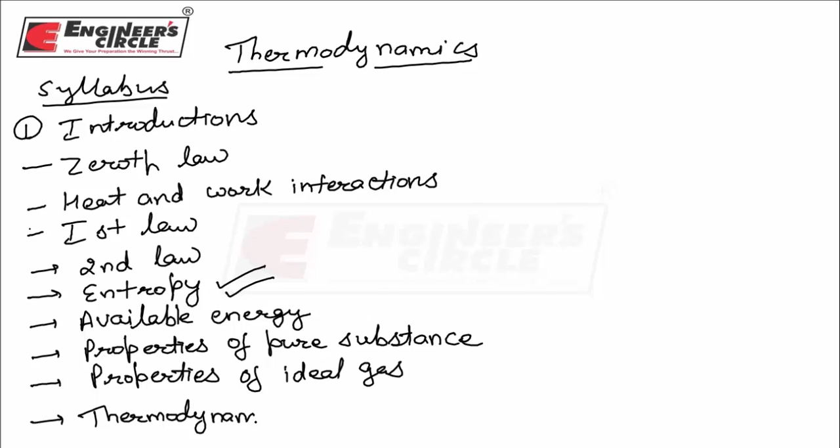Our last chapter would be thermodynamic relations. In this chapter, we will study the mathematical terms of thermodynamics, like TdS equations, energy equations, Joule-Thomson coefficient, Clausius-Clapeyron equation, and so on. This chapter is basically a mathematical chapter, nothing more than a conceptual chapter.

So this will be my whole syllabus for engineering services and for GATE. If I would start with the introduction part, first we will learn about some basic concepts of thermodynamics.

Before going to some basic concepts of thermodynamics, first of all we have to know what this subject belongs to, means what is the meaning of thermodynamics, what we are going to learn in this chapter. So thermodynamics is a science of energy transfer.

Thermodynamics is a science of energy transfer and its effect on properties of a system. This is the meaning of thermodynamics. It is a science of energy transfer and its effect on properties of your system.

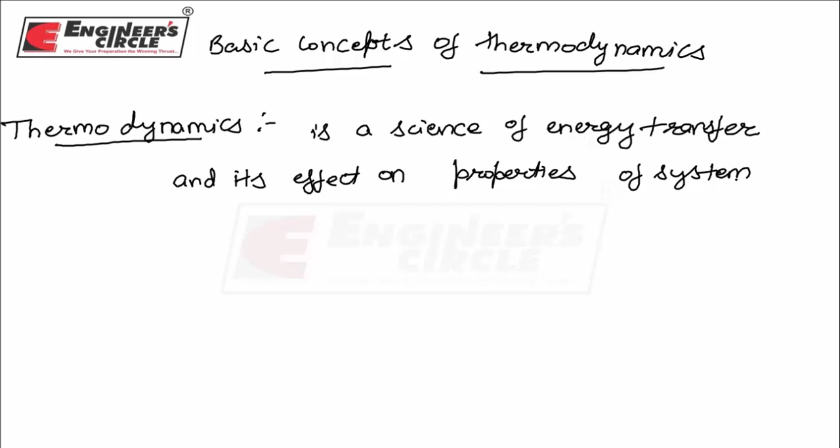The main aim of thermodynamics, if I talk about the aim of this chapter, is to convert disorganized form of energy. We will study later what is the meaning of disorganized form of energy, or low grade form of energy, which is known as heat. Heat is a form of disorganized energy. So the aim is to convert disorganized form of energy, that is heat, into organized form of energy. This is the basic aim of the chapter of thermodynamics.

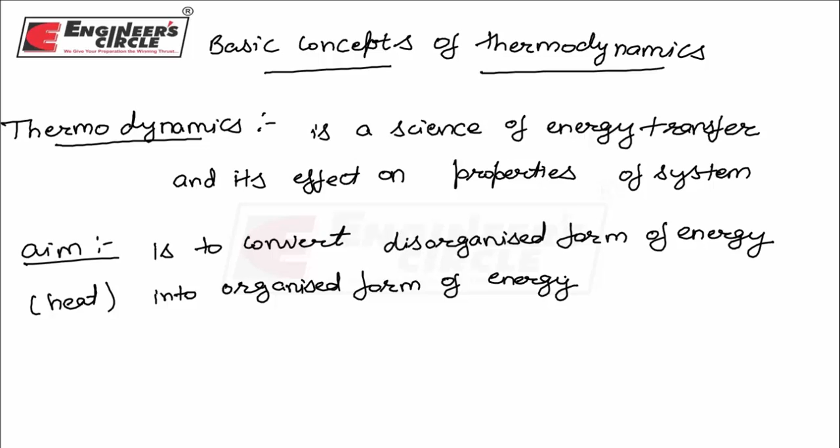So if I go to some basic terms of thermodynamics, first of all my basic term is: what is the meaning of system? If I would say, system is a region in space upon which the study is focused. This means the system is that region of space in which you have to study the various properties of the system, what changes occur in the system because of some heat transfer or work transfer. So that space on which you focus during the experiment is known as the system.

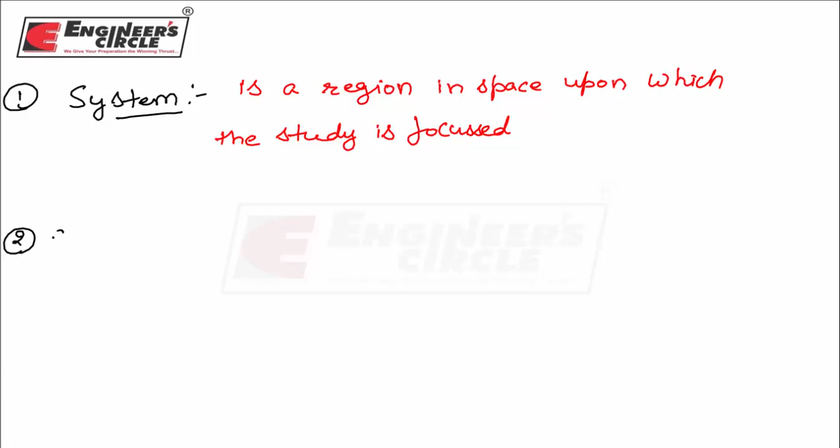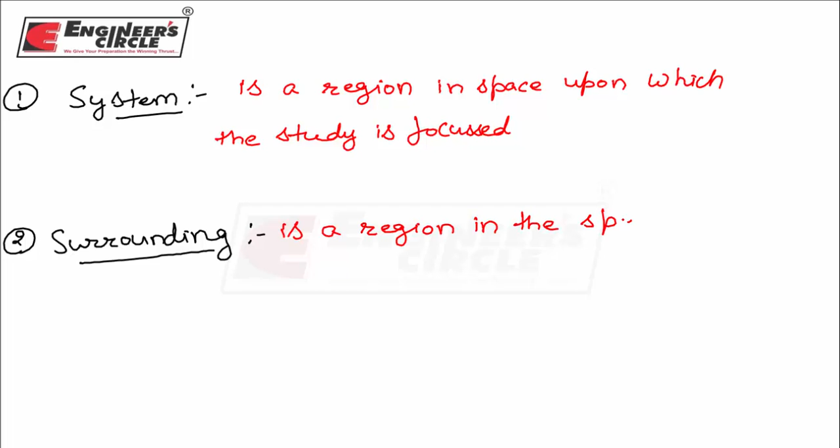The next term we will discuss is surrounding. Surrounding is, if we talk about it, while system is that space on which my concentration occurs during my experiment, surrounding is a region in the space which is external to the system. First of all, during the experiment we define what is my system, and anything which is external to that system is the surrounding. Please note that anything which is external to the system is your surrounding.

So the system may be defined as an open system or closed system, we will discuss it later. But when we define a system, a region in space, anything external to that region is my surrounding. So the system would be of three types: one is closed system, one is open system, and the last one is isolated system. We will discuss these later.

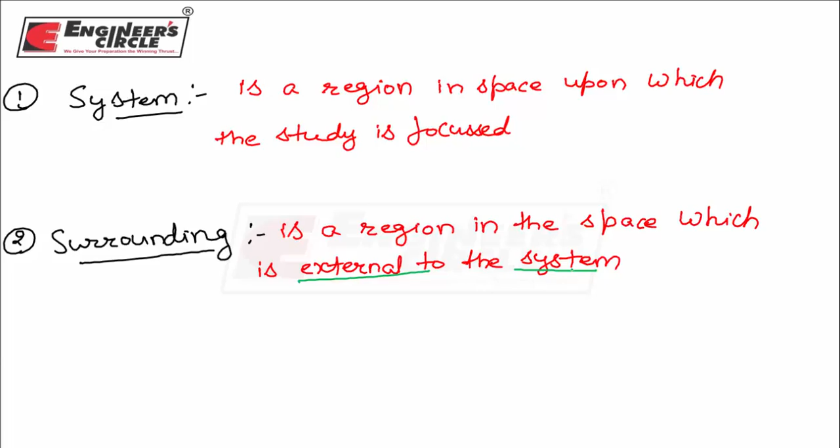The next definition is of boundary. Boundary is that region, or that separation between system and surrounding. That layer or membrane which separates your system and surrounding is known as the boundary. Anything which separates your system and your surrounding, that thin layer or membrane or boundary, is known as the boundary of the system.

If I talk about the various properties of the boundary of the system, the boundary may be rigid, meaning it will not move. It may be flexible, meaning it will move during the experiment. It may be real, actually present in the system, or it may be imaginary. There are four types of boundary: rigid boundary, which does not move; flexible boundary, which moves in the direction of the process during the experiment; real boundary, which is actually present in the system and which we can see with our eyes; and the last one is imaginary boundary, which we draw during our experiment because of the non-existence of a real boundary.

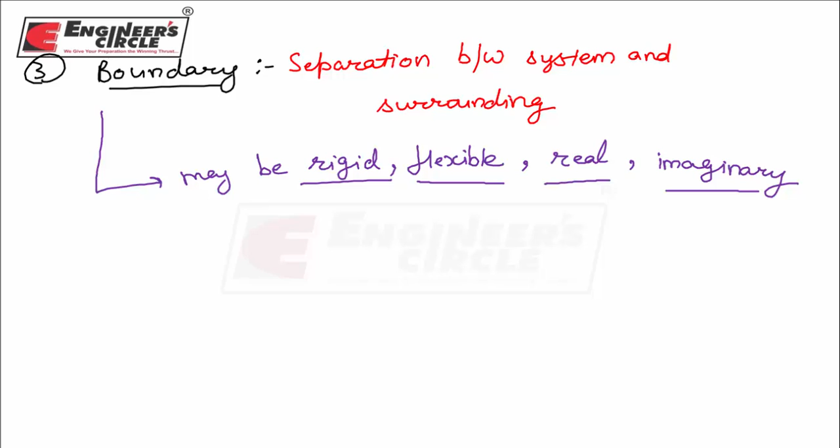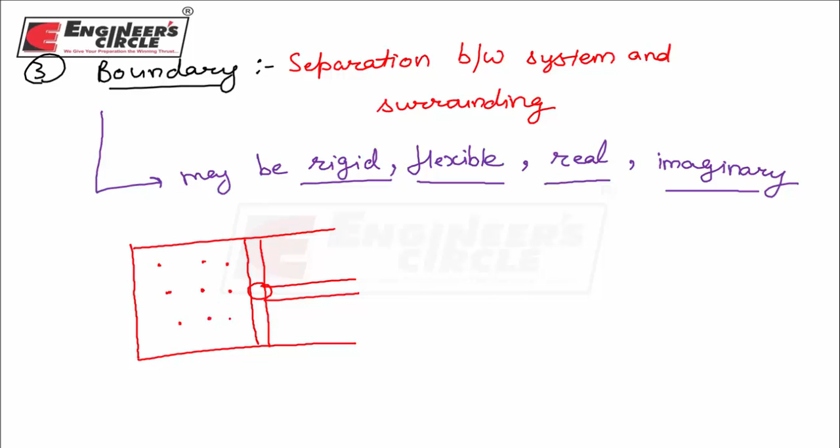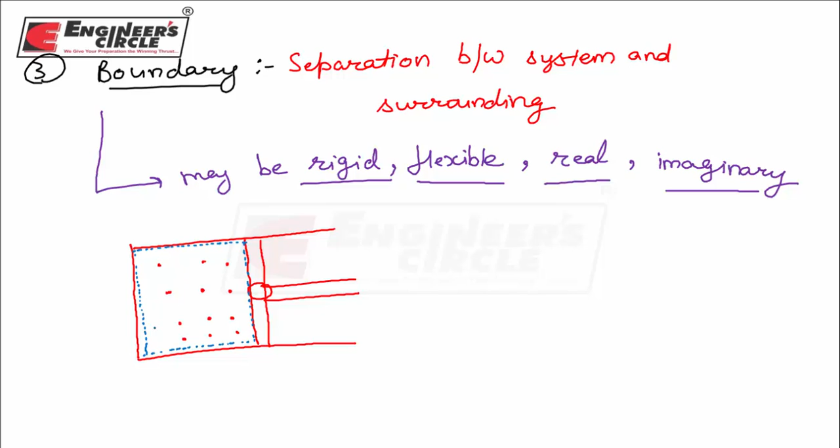Suppose I have to define the system for this piston cylinder arrangement. I would say that this dotted part is my system—my whole concentration during the experiment is focused on this area. External to this dotted area is my surrounding.

So if we talk about the system and surrounding, the layers that differentiate between them are known as the boundary. In this system there are four boundaries. Three of these, the dotted lines above and on the sides, are rigid boundaries, meaning they will not move during the experiment even when the piston is moving.

If I talk about the boundary coinciding with the piston wall, this boundary will move when the piston moves. So this is a type of flexible boundary. If compression occurs, volume decreases and the piston moves towards the left. If expansion occurs, the piston moves towards the right. So that wall moves along with the process, and this is known as the flexible boundary.

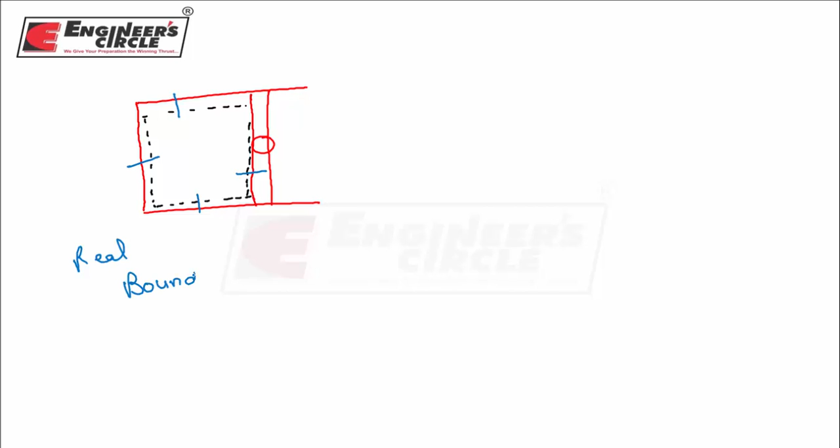Now let's talk about the meaning of real and imaginary boundary. Again considering the same piston cylinder arrangement, this dotted part is my system. We already know this system has four boundaries present, and all of them—this boundary and these dotted lines—are real boundaries, meaning they are actually present in the system. We can see them with our eyes. So these are known as real boundaries.

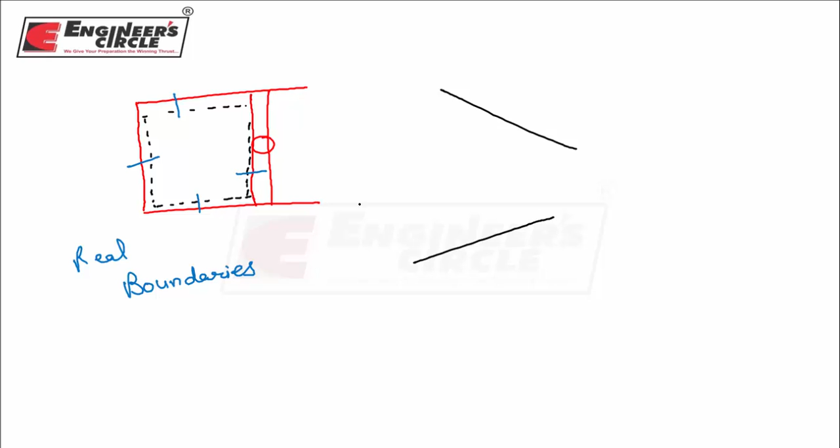Now let's talk about the meaning of imaginary boundary. Suppose I am considering a nozzle in which fluid flows from this direction to this direction, through this converging nozzle. This is a case of open system, which we will discuss later. In this case, I would say that this dotted part is my system. My consideration is only on this dotted part—I am interested in the properties of the system inside this dotted portion. I defined my system through this type of boundary.

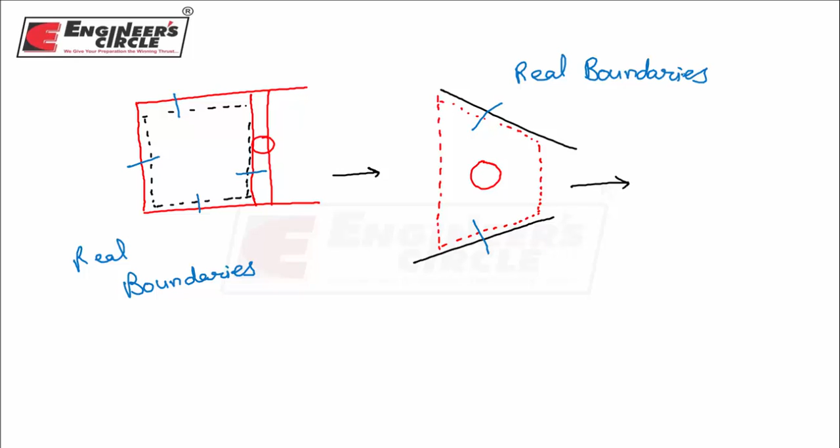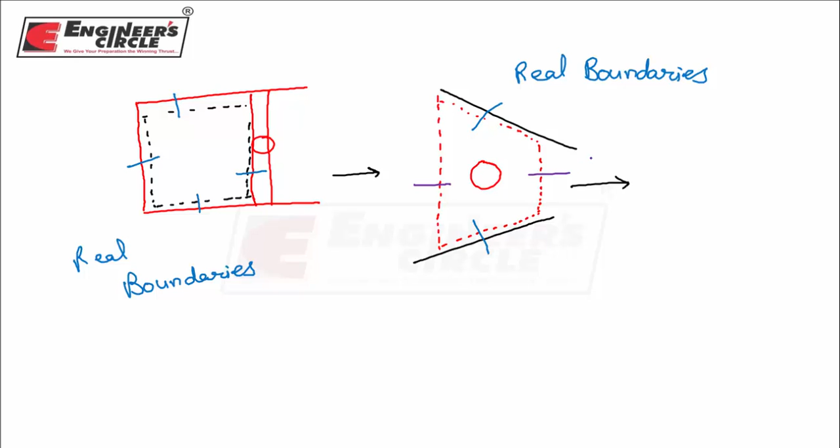Going through the types of boundary here, these two boundaries which are actually present in the system are known as real boundaries, because they are actually present. The other two boundaries are not exactly present in the system—I only virtually draw these two lines to define my system. If I don't draw these lines in the space, I will never define my system. So these are known as imaginary boundaries, because they are not actually present in the system.

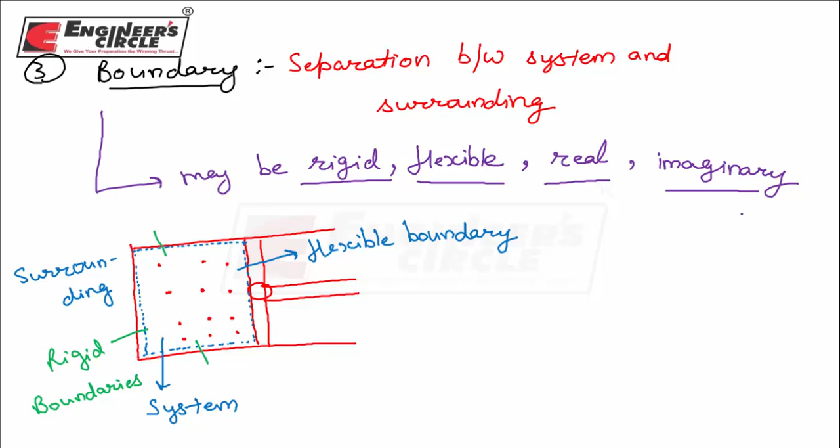So boundaries are of two types. One is rigid and flexible boundary—rigid boundary means it will not move during the process, flexible boundary means it will move during the process. The next type is real boundaries, which are actually present in the system, and imaginary boundaries, which we draw so that we can make our system more or less defined. Also, the system and surrounding together comprise the universe.

If I would say that one thing I will study is my system, anything external to that system is my surrounding. And if I combine my system and surrounding, this will cover my whole universe. You have to note this point: the region on which your study is focused is your system, anything external to that region is your surrounding, and the combination of system and surrounding is known as your universe. So universe is system plus surrounding.

Next, our topic is types of system. As I earlier told you, there are three types of system. The first one is your closed system.

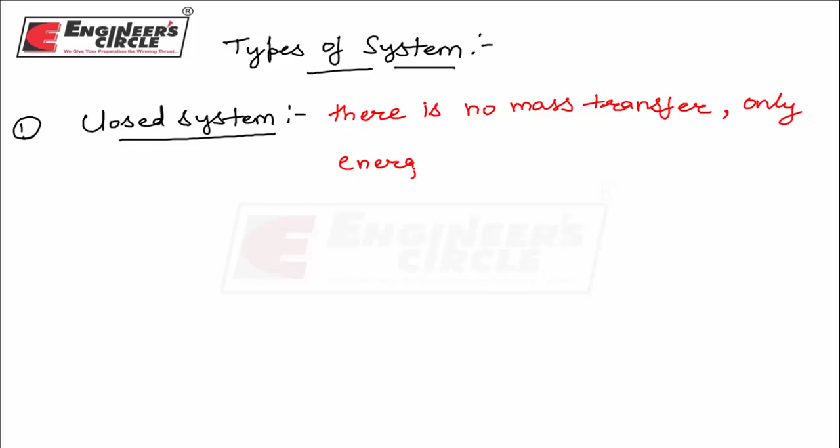As the name suggests, closed system means there is no mass transfer. Only energy can transfer in the system. Mass would never enter the system, nor will it leave the system. Energy is of two types: only heat or work can enter the system or go out of the system, but mass will never leave or enter the system.

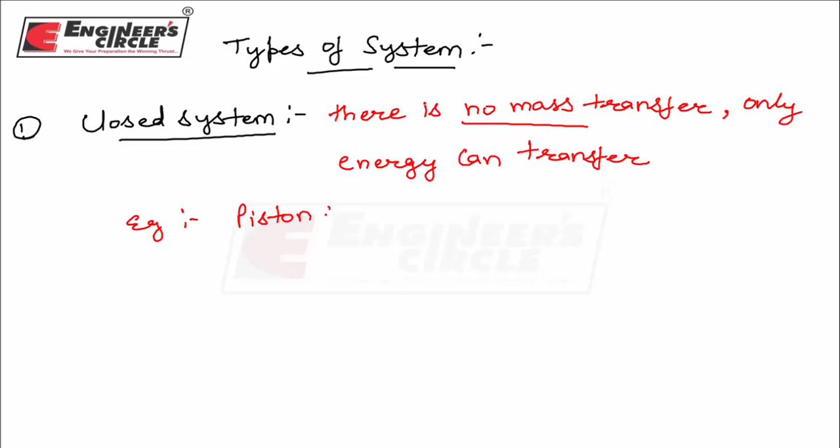If I talk about the examples of closed system, an example of closed system is your piston cylinder arrangement, which we studied earlier. So this piston cylinder arrangement without having any valves is your closed system. So closed systems are those in which there would be no mass transfer.

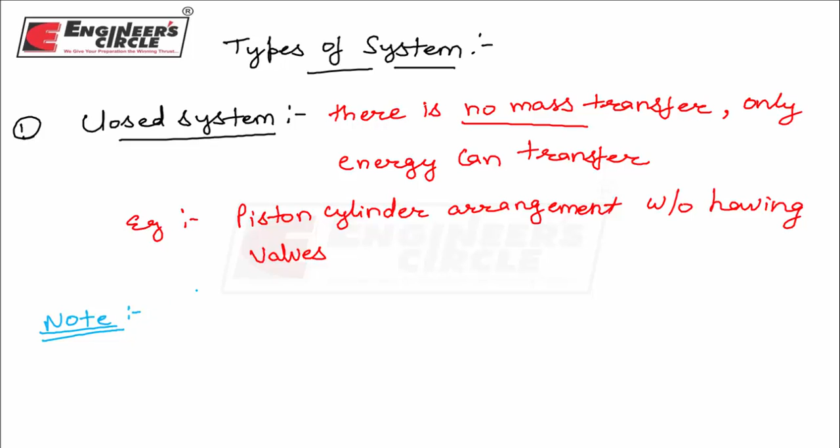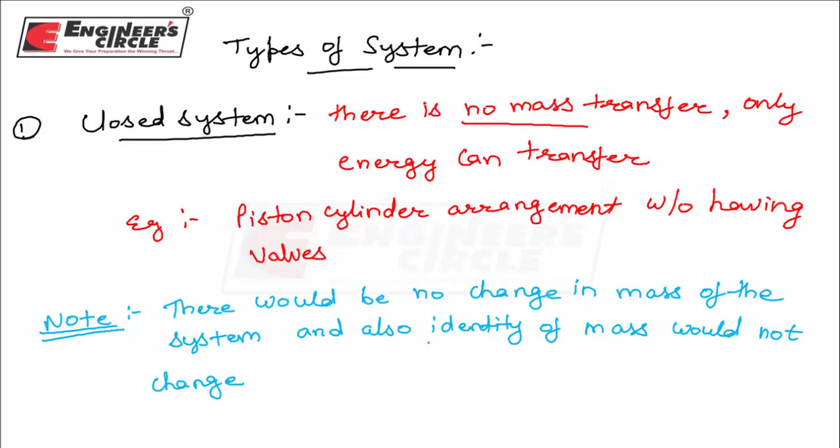If I take it in another definition, in closed system you have to note one most important point. There would be no change in mass of the system. Mass of the system would not change, and also, most important, the identity of the mass would not change. What is the meaning of this line, identity of mass would not change?

Let us suppose that this is any system which I will define. I draw the boundaries to define my system: the area under this dotted line is my system. From here there is some mass flow rate, m dot 1. This is your inlet section and this is your outlet section, and from the outlet there is a mass flow rate, suppose m dot 2.

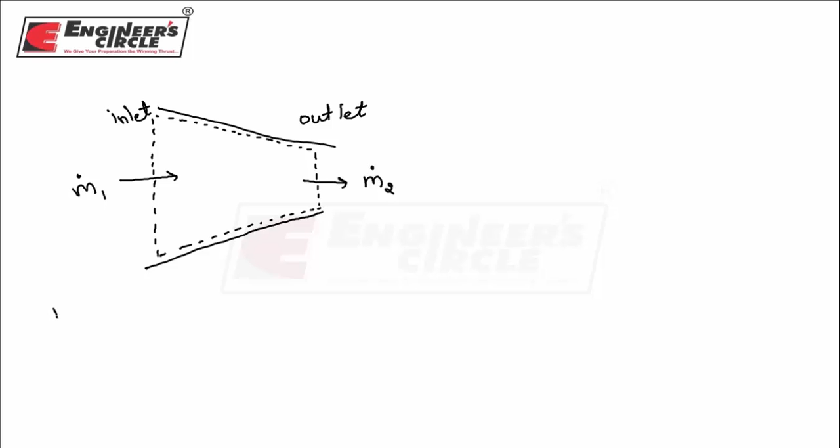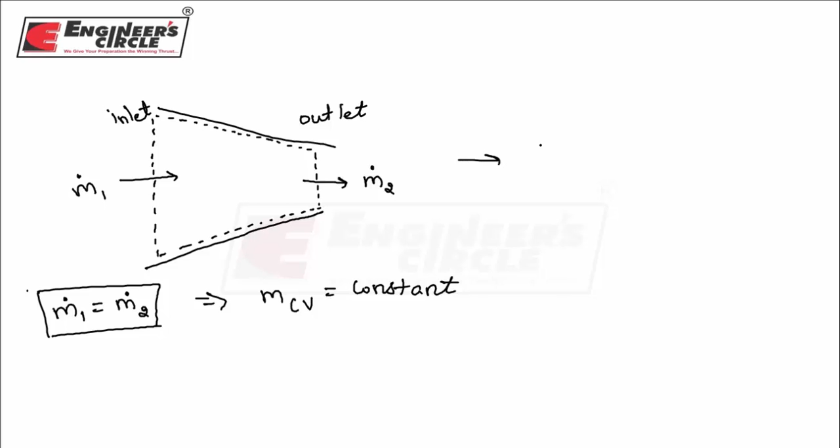If the mass flow rate m dot 1 is equal to the mass flow rate m dot 2, the mass entering is equal to the mass leaving the system, it means the mass of the control volume, or of your system, is constant. But this is not a closed system, because in this case the identity of mass in the system changes, and if identity changes, it is not a closed system.

What does the change of identity mean? Suppose a particle enters; it will have some energy. When a particle enters a thermodynamic system, it will have four types of energy: internal energy, flow energy, kinetic energy, and potential energy. So when m dot 1 enters the system, it has some kind of energy, some identity. When it leaves, it will have another kind of energy, another identity, because its identity changes.

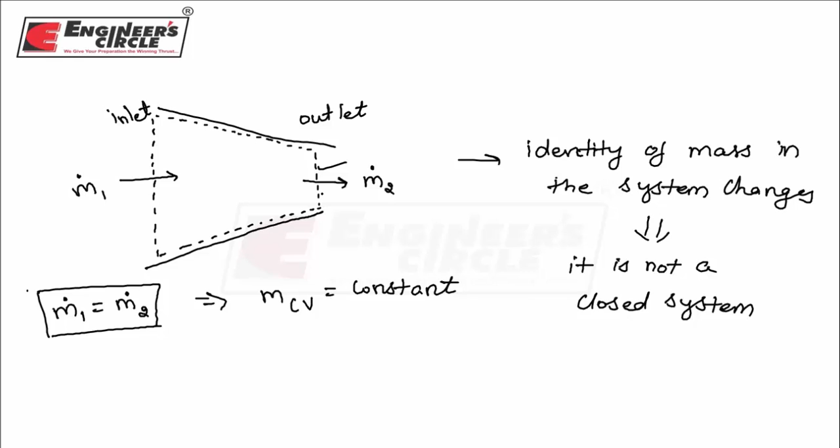Correlate it with your classroom: suppose there are 100 students, and at one instant one student enters and another leaves. The mass of that classroom will not change, but the identity of the person leaving is different from the person entering. Identity of the mass changes, so that system is not a closed system, it is an open system. In closed system there would be no change in identity of the mass. The second type of system is your open system.

Second type is my open system. Open system means both energy and mass can transfer. Both energy transfer and mass transfer takes place in the system.

It means in the system your mass can also transfer, mass can also enter into the system, also leave from the system, and also your energy, that is your work and heat, energy transfer can take place in the system. This is known as your open system. Open system has both energy and mass transfer taking place in the system.

If I talk about examples of this open system, we know there are devices known as turbines, pumps, compressors, etc. So turbine, pumps, compressor, in which mass transfer and energy transfer both take place simultaneously. It is known as your open system.

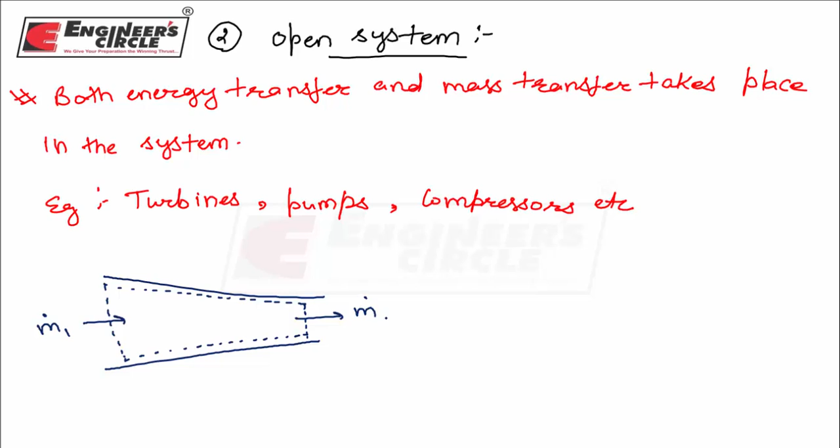Mass can enter, mass can leave. There is energy transfer also, means heat can enter the system, heat can leave from the system. Work can be done by the system, or we will do some work on the system. So work can be transferred, heat can be transferred, and also mass transfer will take place.

So in this case, in open system, the volume on which our study is focused is known as your control volume. Control volume is that region in space, in case of your open system, on which my whole analysis is focused, and this is known as your control volume.

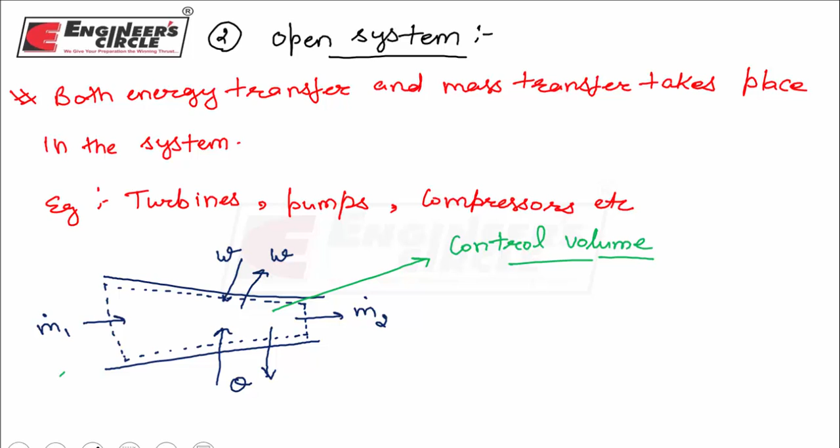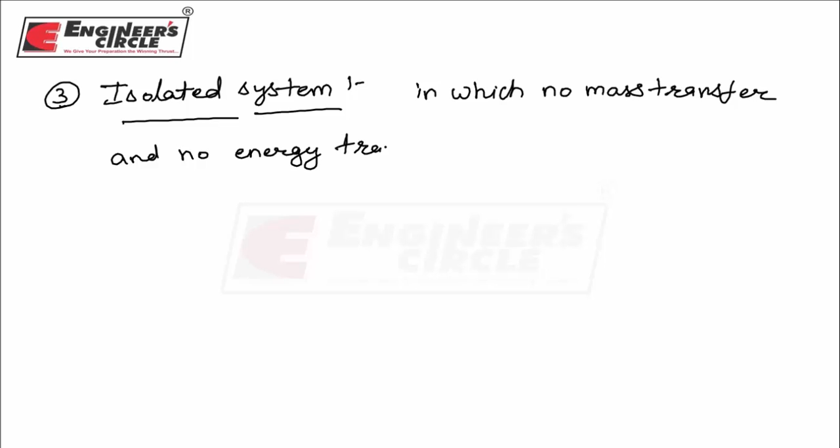Third type of my system is your insulated or isolated system. An isolated system is that system in which no mass transfer and no energy transfer takes place.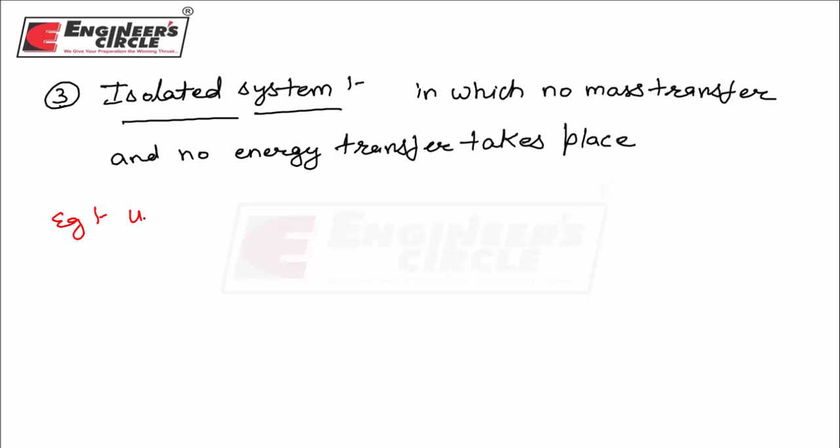If I talk about examples of your isolated system, one is the universe. Universe is my isolated system. You have to remember this, because we know the composition of the universe. Universe comprises your system and surrounding. The external to the system is surrounding.

So if we talk about the whole thing, the universe, there would be no mass transfer in the universe, and no energy transfer takes place in the universe. So this is the case of your isolated system. Next example is insulated bottles, our thermal bottles, in which we fill some warm water or something. So this is known as your isolated system.

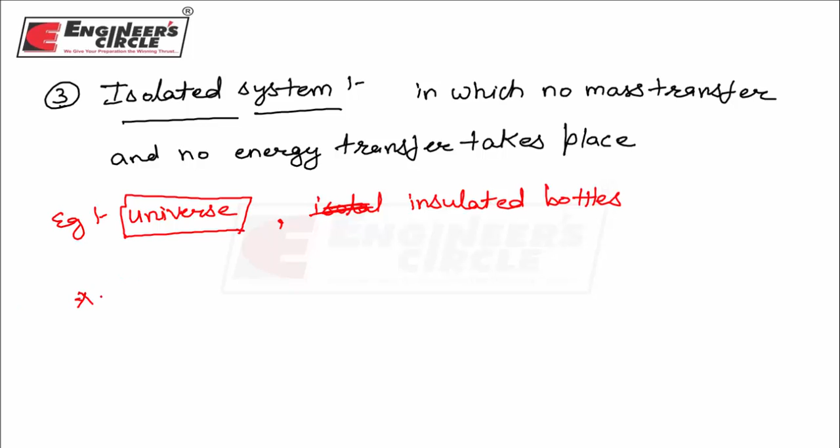So isolated system, if I precisely say, is a special case of closed system in which no energy transfer takes place. Remember, we know that in closed system there is no mass transfer, and if in that closed system there is no energy transfer, it will behave as an isolated system. So isolated system is that system in which no energy transfer and no mass transfer is taking place.

Next important topic is known as thermodynamic equilibrium. It's not a thermal equilibrium, it's a thermodynamic equilibrium. So what is the meaning of thermodynamic equilibrium? We will take everything with respect to the system, because my whole concentration depends on this part, that is the system.

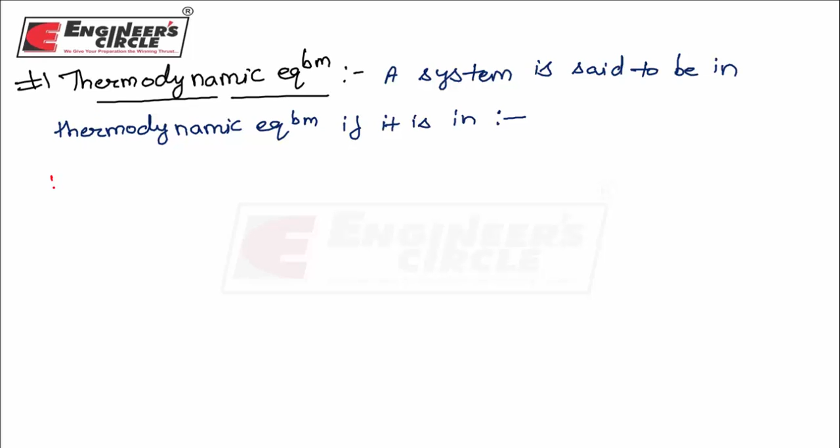A system is said to be in thermodynamic equilibrium if it is in, there are some cases, number one, thermal equilibrium. If it is in thermal equilibrium, means equality of temperature.

What does equality of temperature mean? Thermal equilibrium means the temperature of the system and that of the surrounding would be the same. There would be no temperature gradient present in the system and also with the surrounding.

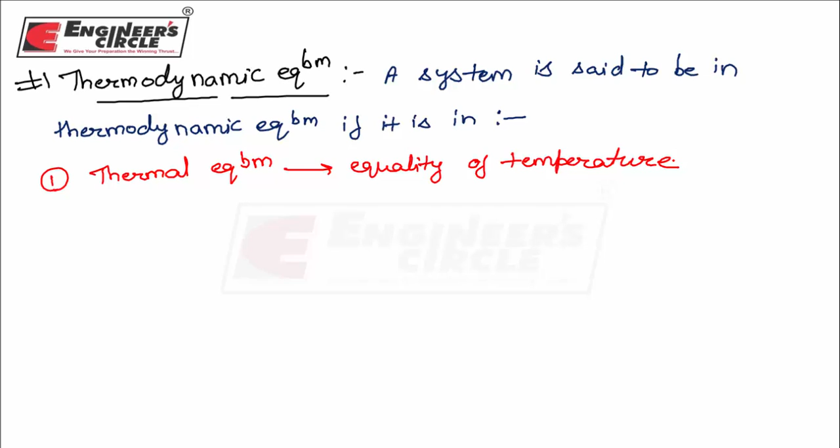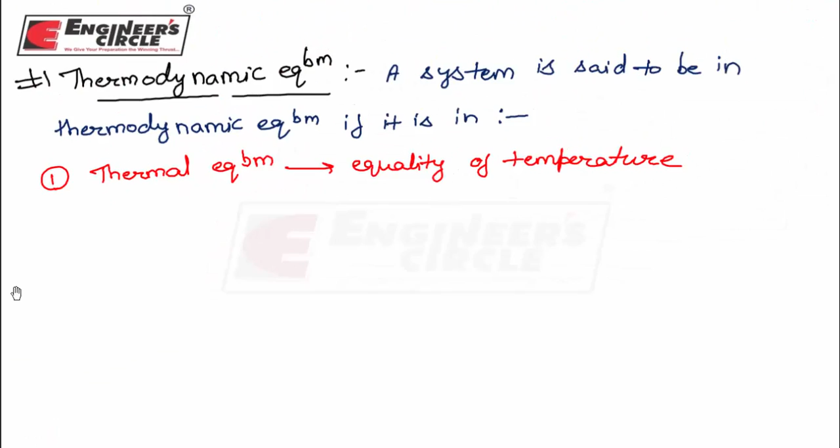Please remember, equality of temperature or thermal equilibrium, if I have to explain it here in short, what is the meaning of thermal equilibrium? Let us take this example. This is a system, any closed system. Suppose in this system the temperature is 50 degrees Celsius.

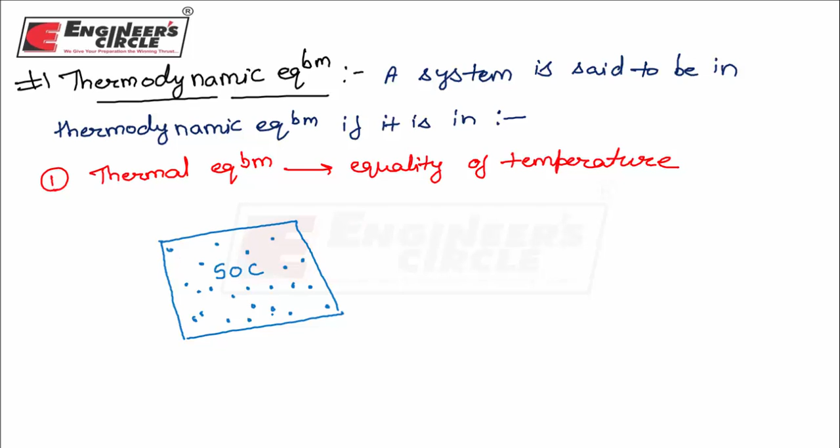There would be no temperature gradient inside the system, which means you take any point in the system, at every point the temperature would be 50 degrees Celsius. And external to this system behaves as my surrounding, and the surrounding temperature is represented by T infinity.

T infinity should also be 50 degrees Celsius, so that there would be no heat transfer, or precisely, there would be no temperature gradient between the surrounding and the system. Temperature gradient means the difference in temperature. As we know, if there is a temperature gradient present, heat will transfer.

So there would be no temperature gradient inside the system, and also no temperature gradient between system and surrounding. Then only we can say that the system is in thermal equilibrium. So for thermal equilibrium, equality of temperature holds good.

The second condition for thermodynamic equilibrium would be mechanical equilibrium. Mechanical equilibrium is equality of forces or pressures. What is the meaning of equality of forces or equality of pressure?

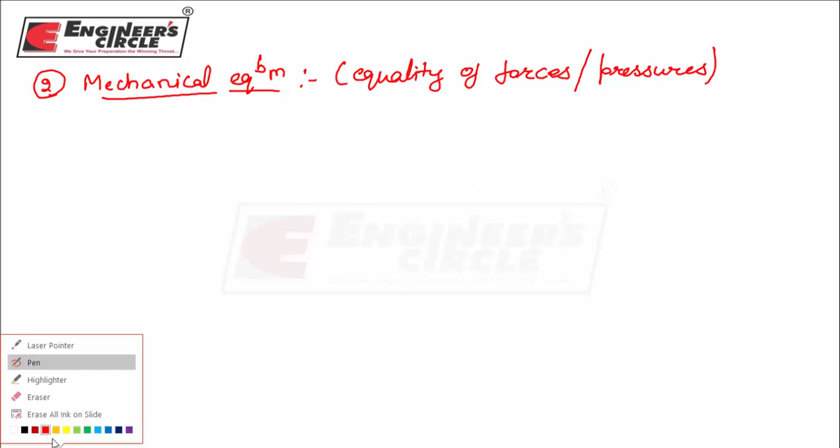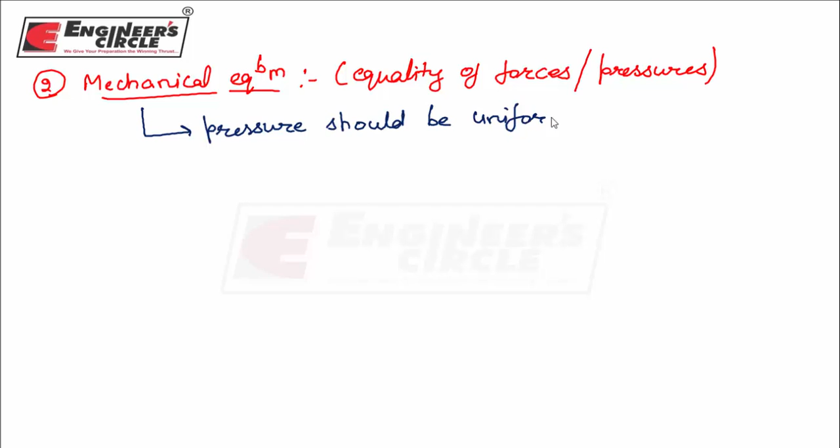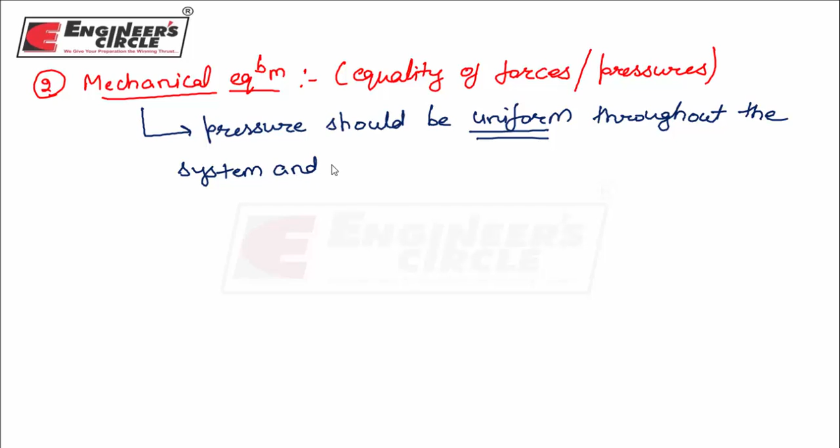Please note that equality of pressure means the pressure should be uniform throughout the system, and there would be no pressure gradient present inside the system, because we know that if there is any pressure gradient present, a net force occurs on the system,

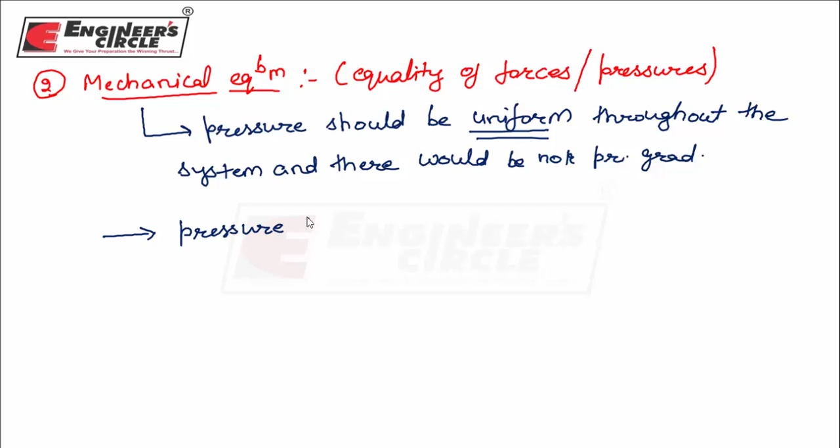so the system would never be in mechanical equilibrium. Here, in mechanical equilibrium, this pressure can change with time. It means it can be an unsteady state, but it will be uniform throughout the system. What is the meaning of this line? It can change with time. Suppose this is a system.

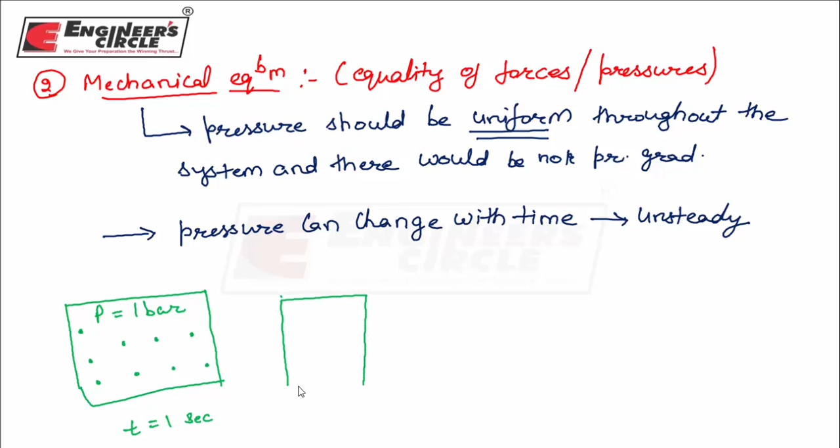When I study this system at t equal to 1 second, the pressure inside the system is 1 bar, which means at any point in this system the pressure would be 1 bar. And if this time changes, suppose I am studying at t equal to 5 seconds, the pressure will be 5 bar,

but it will remain 5 bar throughout the system, meaning at one instant the pressure should remain uniform throughout the system. It can change with time, but it will remain uniform at that instant. So pressure should be uniform but may be unsteady. It can change or not, depending on the process. So the second one is mechanical equilibrium.

The third condition is chemical equilibrium. What is the meaning of chemical equilibrium? Chemical equilibrium means there would be equality of chemical potential. No chemical reaction should occur inside the system. That means it behaves as an inert type of system. So chemical equilibrium means equality of chemical potential.

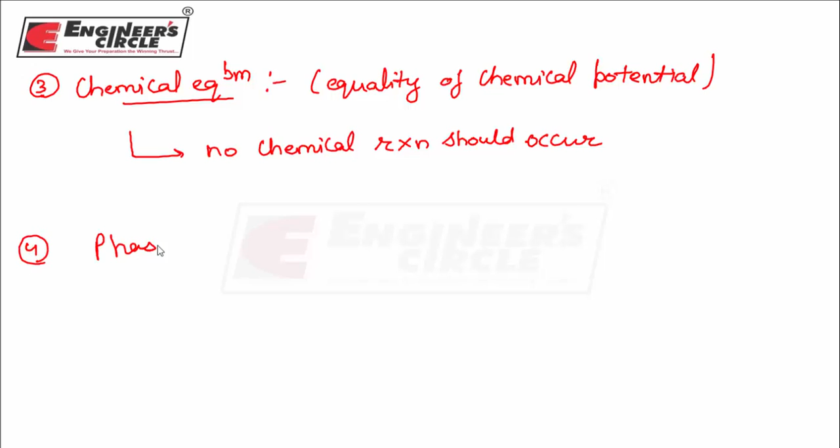And the fourth condition is phase equilibrium. Phase equilibrium means for thermodynamic equilibrium there would be no change in phase in the system, which means there is no conversion of solid to liquid or liquid to solid, solid to vapor or vapor to solid. Then only we can say that this system is in thermodynamic equilibrium.

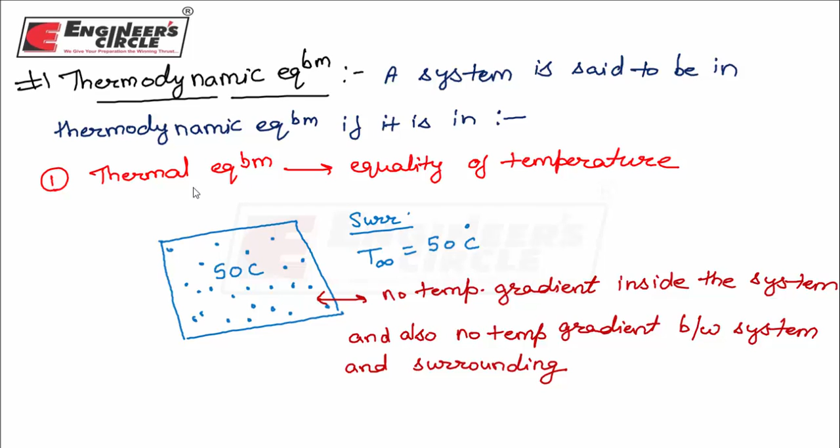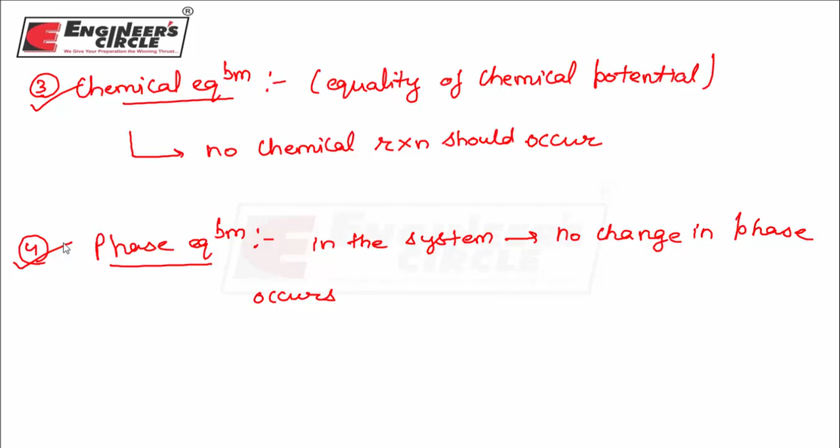So for thermodynamic equilibrium, the first condition is thermal equilibrium, second is mechanical equilibrium, third is chemical equilibrium, and fourth is phase equilibrium. Then only we can say that the system is in thermodynamic equilibrium. The next topic in this lecture is what is a pure substance.

What is a pure substance? We will discuss pure substance later also, but here I am only discussing the definition of pure substance, the meaning of pure substance. I will discuss the various conditions of pure substance and various phase diagrams of pure substance in our later chapters, but here I will introduce only the definition of pure substance for the time being, for your understanding.

A substance is known as a pure substance if it is homogeneous in chemical composition throughout. A pure substance is that substance which is homogeneous in chemical composition throughout. Chemical composition throughout means if I select any sample from that system, it will have the same composition throughout.

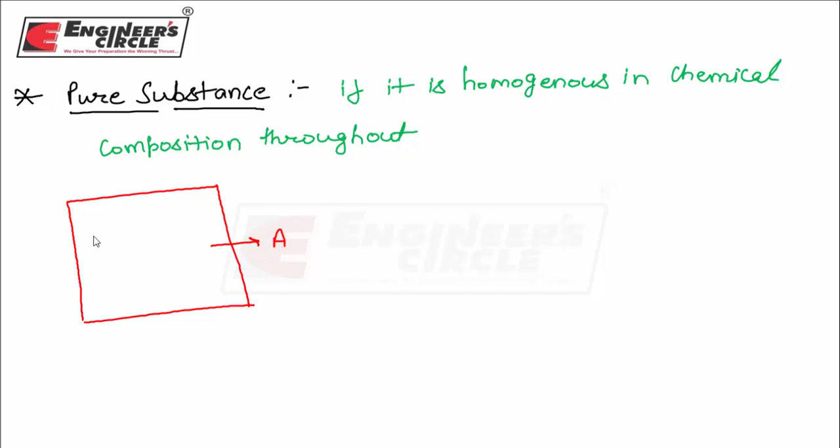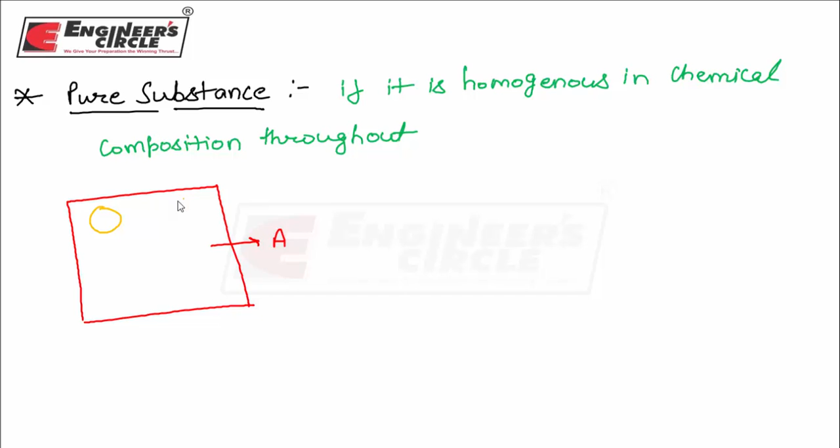This is my one substance, a system. If in this jar I fill some material, suppose some gas, A gas, and I take any sample of that gas from this system, suppose a sample from here, a sample from here, and one sample from here. If I take 5 samples from this system and all of them have the same chemical composition throughout, then only we can say that this is behaving like a pure substance.

All of the above samples should have the same chemical composition.

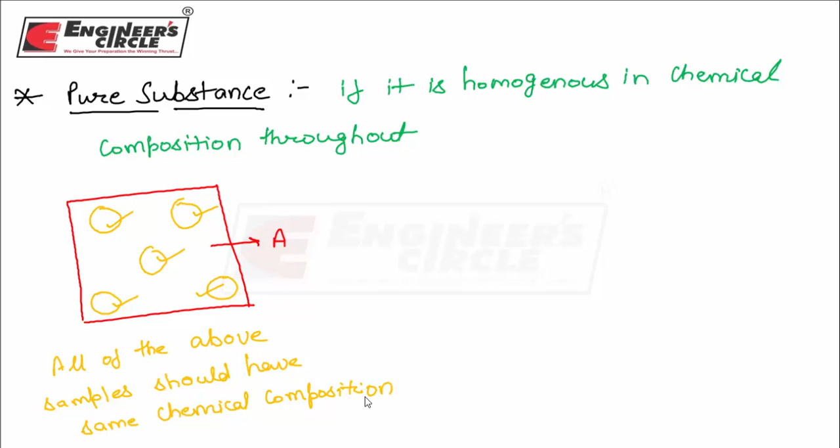If we take some example of pure substance, suppose this is a beaker, and here I fill some water. This is water, and here some steam is present. Steam is also a composition of water, because steam is another phase of water, which is in gaseous phase. So if I fill some water and steam, and I take 3 samples: one from the steam, one from the water, and one from the interface, some from water and some from steam.

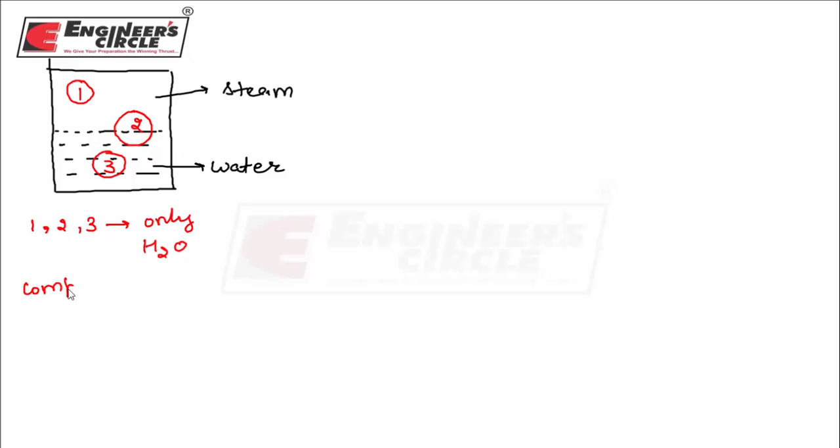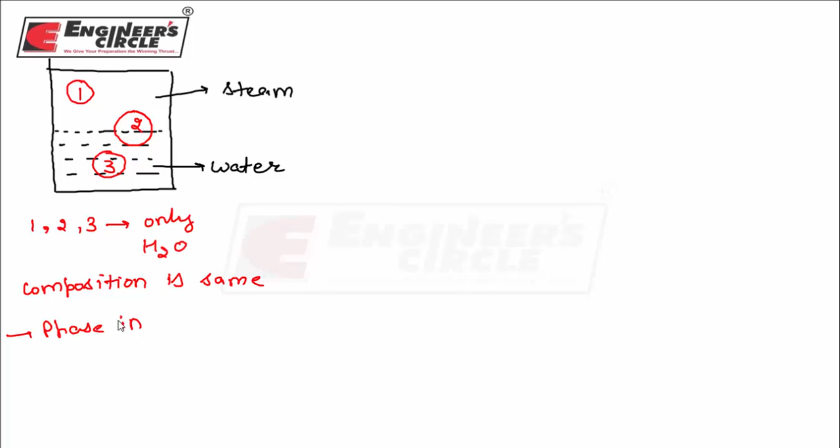This is my sample number 1, sample number 2, and sample number 3, and all of them have the same composition. Samples 1, 2 and 3 have only water; the phase may be different. Here the water is in gaseous phase, here it is in liquid phase, and here it is partially liquid, partially gas, but the composition is the same. For a pure substance, phase may be different, but composition is the same. So this is a case of pure substance.

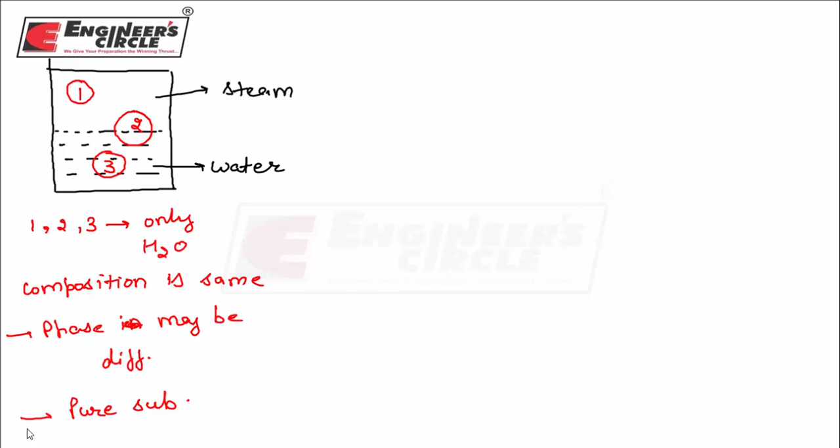Another example: here I took one beaker, and there is a partition, meaning one interface is there. Below is some water and above some oil is present. If again I take three samples, sample number 1 from this part, sample number 2 from the interface, and sample number 3 from here, in sample number 1 only oil is present, in sample number 2 partially oil and partially water is present, and in sample number 3 only water is present.

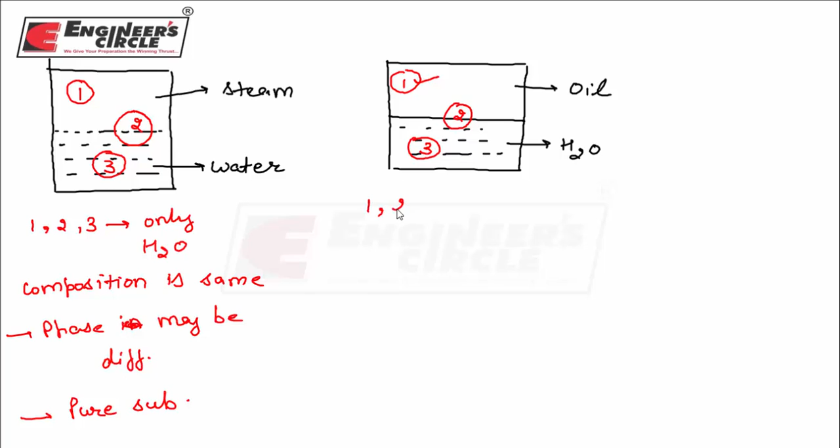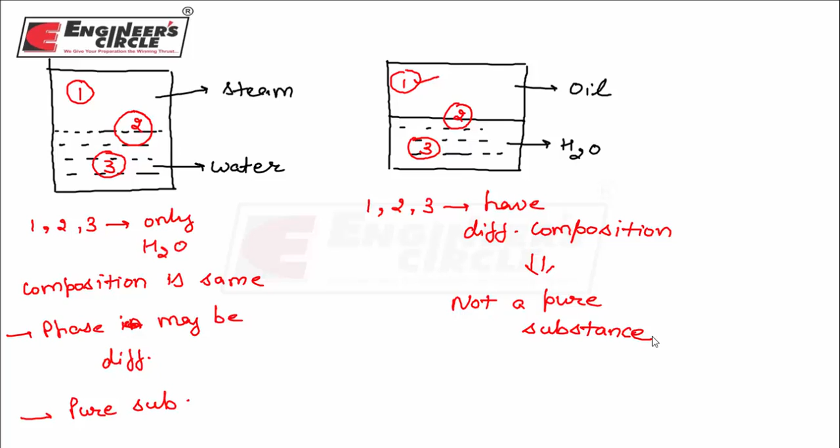So samples 1, 2 and 3 have different composition, which implies that it is not a pure substance. So for a pure substance, the system must be homogeneously of the same composition. Composition must be same throughout the system; the homogeneous mixture is known as pure substance.

Now, going ahead, the next basic topic of the introduction part is properties of a system. What is the meaning of properties of a system? Properties of a system are characteristics of a system.

Properties are characteristics of a system. These are the characteristics by which I am going to define my system. My system would be defined with the help of some properties like pressure, temperature, volume, mass, entropy, internal energy, enthalpy. All these are the characteristics of a system with the help of which I will say that in this system the pressure is so much, temperature is so much. So properties are the characteristics of a system.

Examples of properties of a system are pressure, volume, internal energy. We will talk about what is the meaning of internal energy; I am just writing here. Internal energy, enthalpy, entropy, and so on. I am writing only pressure, volume, internal energy, enthalpy and entropy. There are n number of characteristics of a system.

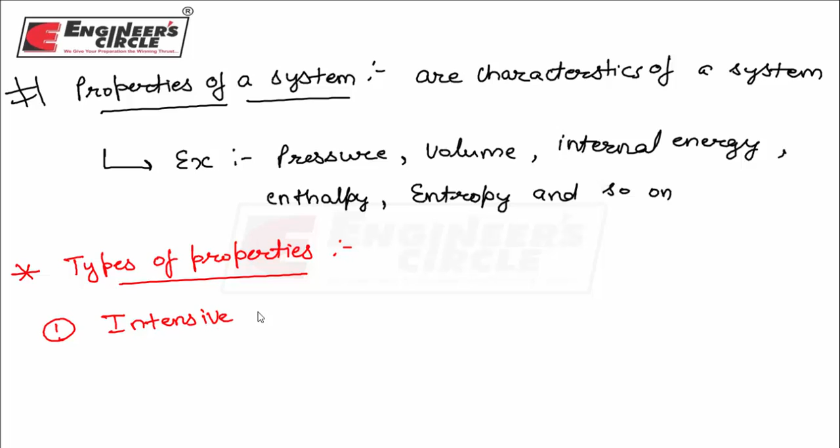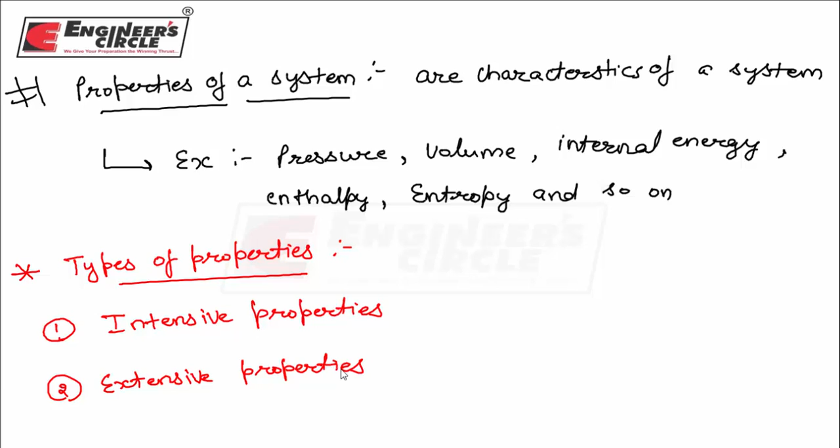Now the next most important topic is types of properties. There are two kinds of properties. First one is intensive properties and second one is extensive properties. We will take first intensive property. As we know, properties are the characteristics of a system, and these characteristics are of two types: intensive and extensive.

Intensive properties are those properties or characteristics which are independent of mass. They will not depend upon the mass of the system, which means if I decrease or increase the mass of a system, the value of that property remains the same as earlier. So to learn it: I is for intensive and I is for independent. Intensive properties are independent of mass.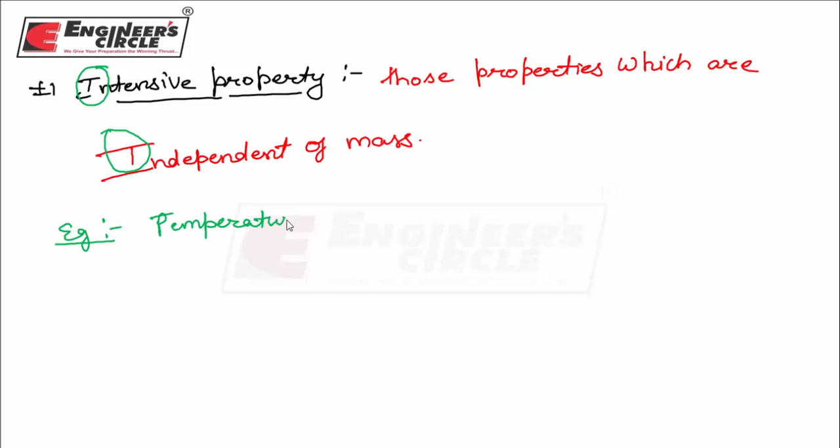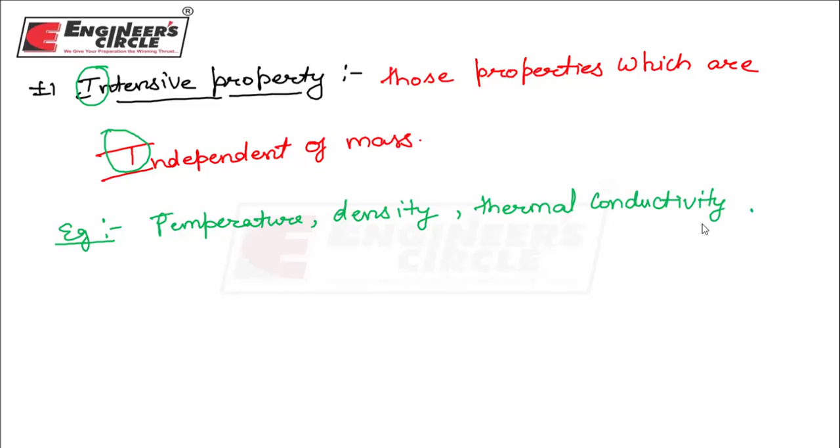Examples of intensive properties are temperature, density, thermal conductivity, viscosity, and pressure also. Pressure, temperature, density, thermal conductivity, viscosity, etc. are intensive properties which will not depend upon the mass of the system.

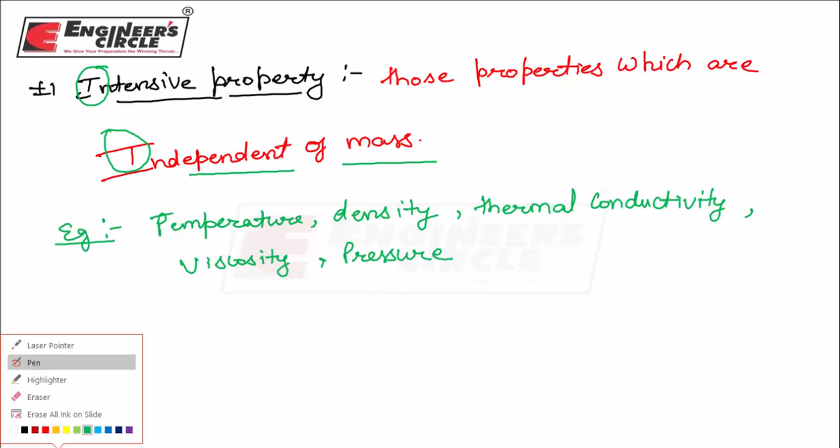What is the meaning of independent of mass of a system? Suppose there is a system having some mass, say 1 kg. If by any means I compress that system to a point, I know that a point has no mass, no volume and no area. That means at that point the mass of the system is 0. If at that condition also some properties are defined, then those properties are known as intensive properties.

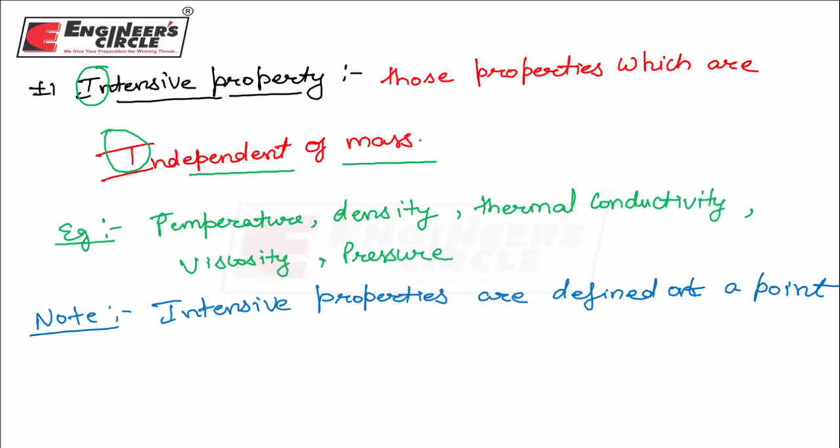Intensive properties are those properties which are still defined when you make the mass of a system 0. That means intensive properties are defined at a point. This is the most important conclusion. Only intensive properties are defined at a point, because intensive properties are independent of mass, and at a point mass is 0. You have to note this.

A good example is stress. In strength of material, you will study about stress. Precisely, stress is always defined at a point. I am only recapitulating your concept. If something is defined at a point, that means it is an intensive property. So stress in strength of material is an intensive property. This is the concept of intensive property; please note that.

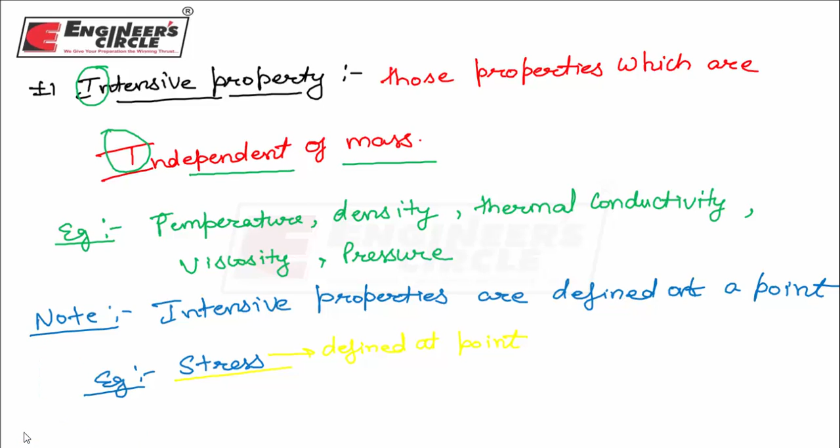The second type is extensive property. What is the meaning of extensive properties? As we know, intensive properties are independent of mass. So extensive properties are those properties which will depend on the mass of the system.

If I am going to increase or decrease the mass of a system, the values of these properties will change. So it will depend on the mass of the system. Those properties which depend upon the mass of the system are known as extensive properties, since extensive properties change when you change the mass of a system.

Some examples of extensive properties are volume, internal energy, enthalpy, and entropy. Volume, internal energy, enthalpy, entropy - these all are your extensive properties.

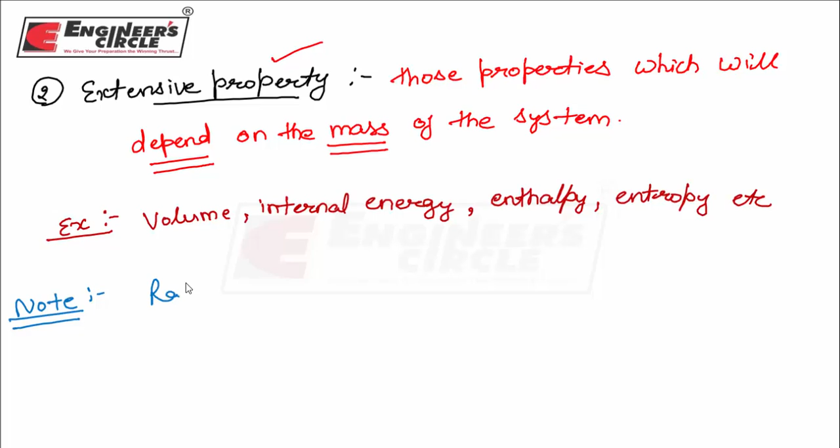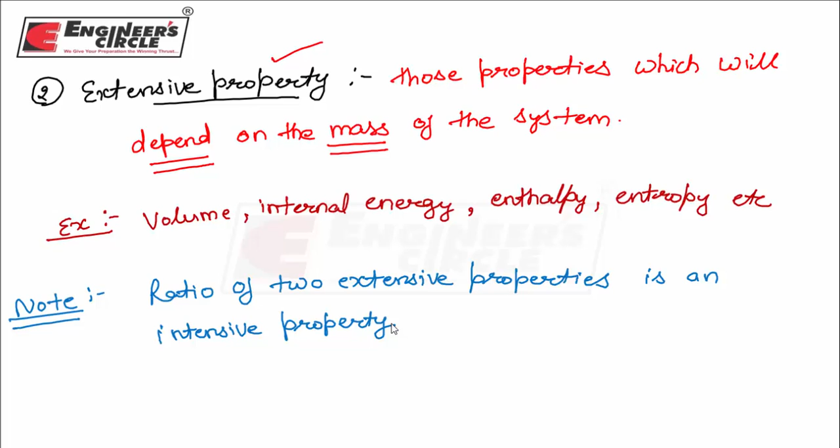Please note this important statement for your objective point of view: the ratio of two extensive properties is an intensive property. Meaning, if we take the ratio of two extensive properties, suppose internal energy per unit volume, enthalpy per unit volume, entropy per unit volume, that property is an intensive property. You have to remember this thing - the ratio of two extensive properties is an intensive property.

There is a term I am introducing here: specific properties. What is the meaning of specific properties? Specific properties are extensive property per unit mass. Any extensive property per unit mass is known as specific property. If we divide some extensive property by mass, that makes some intensive property. So specific properties are intensive properties - extensive property per unit mass makes you an intensive property.

Examples of specific properties which become intensive properties are specific volume, specific internal energy - we will go through all these terms in our thermodynamics syllabus - specific enthalpy, specific entropy, and so on. Specific properties, which are extensive property per unit mass, behave as an intensive property. So this is a type of properties - one is your extensive property and another is your intensive property.

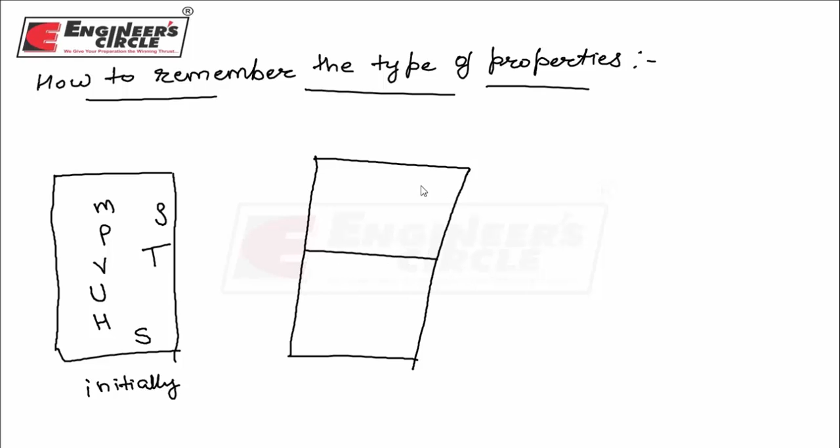If I divide this system into two equal compartments, the same system now has mass m by 2 and mass m by 2. So the mass of the system changes - initially the mass is m, now the mass is m by 2.

Those properties which will not change because of this mass change are known as intensive properties. The temperature would not change - if it was 50 degrees Celsius, it remains the same. Pressure would not change, density would not change, because if mass is halved, volume is also halved, and density is mass per unit volume, so that ratio remains the same. So temperature, pressure and density will not change because of this mass change - these are known as your intensive properties.

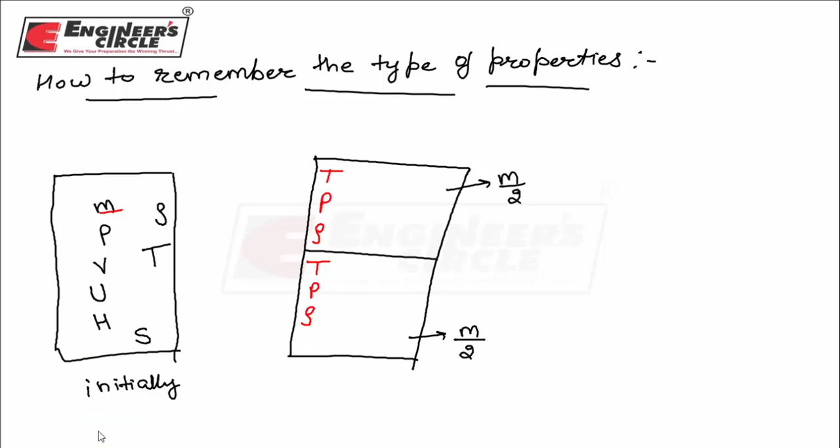Now the properties which will change because of this mass division: volume will become V by 2 and V by 2 - both volumes change, so volume is mass dependent. Internal energy will change to U by 2, enthalpy will change, entropy will change. Volume, internal energy, enthalpy and entropy all change - these are known as extensive properties, while temperature, pressure and density are intensive properties.

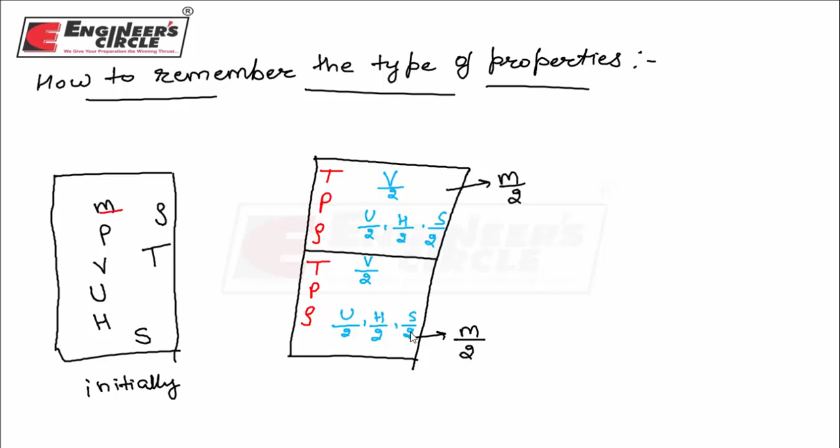Next is the most important topic: important points with respect to properties. What are the various conditions and points which are valid for your property? The first and most important thing is that properties are point functions.

Properties are a point function, not a path function. What is the meaning of this? The property of a system depends upon the final point at which your system would reach. It will not depend on how you reach that point.

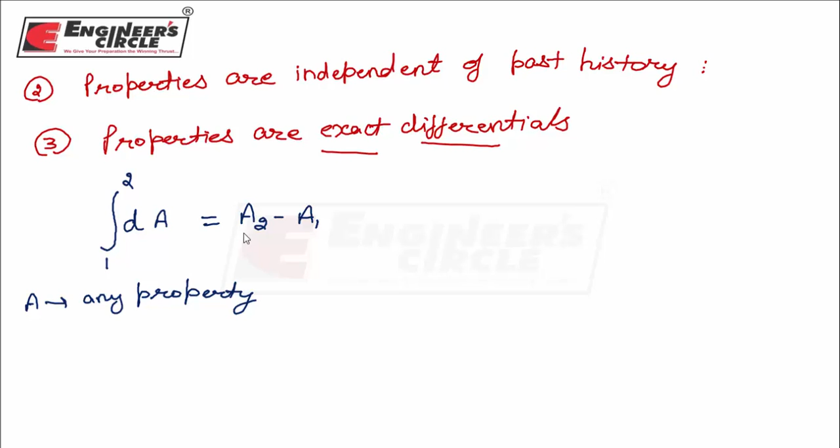Exact differential means if I integrate this dA, this property, from process 1 to 2, from point 1 to point 2, it would be equal to A2 minus A1. This is the meaning of exact differential: the change of property from point 1 to point 2 depends only on the final point and initial point. It will not depend upon the path followed, and this is known as exact differential, that the integration of a property from point 1 to point 2 gives you the value A2 minus A1.

This is known as exact differential. So properties are exact differential. This is the most important unique condition of properties: they are exact differentials.